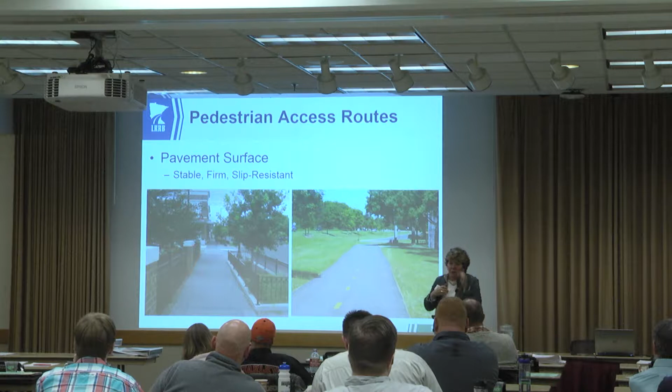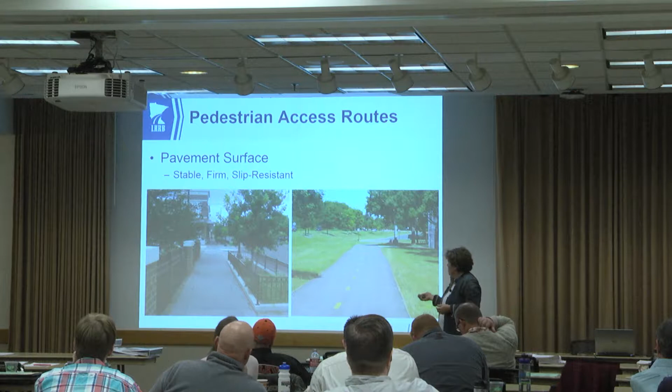Also, if you allow for any secondary cracking, we could get to the point where we meet or exceed the 1/4 inch differential in surface elevation. So bituminous trails offer their own kind of maintenance issues when they fall in the PAR, which they do, because that's why we have them.

Over here we have another kind of pavement surface which is totally okay in the pedestrian access route as long as it is stable, firm, and slip resistant. So here we have a boardwalk. That one looks like wood. You might also have a Trex or a plastic or a composite type of product. Totally okay, but we have to do some things. We have to make sure that there's barriers so somebody doesn't walk off there. We have railings and handrails, all that for safety.

But in the PAR itself, we have to make sure that the boards are closer than 1/2 inch apart. Also, with this kind of surface, you might get some kind of heaving of a board, and it might throw you out of compliance because a vertical deflection of greater than 1/4 inch is a tripping hazard.

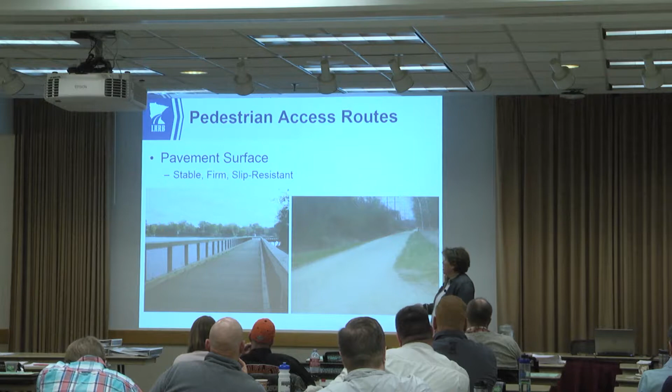Over here we have gravel. Totally okay, as long as it is stable, firm, and slip resistant. So once you get gravel that starts to be washboarded, or you have some bird baths in it, or other things that would not be stable, firm, or slip resistant, then it needs to be maintained or graded so that it is acceptable in the PAR. Sometimes you get greater than 1/4 inch deflection on a gravel road though. I know. So that's a problem.

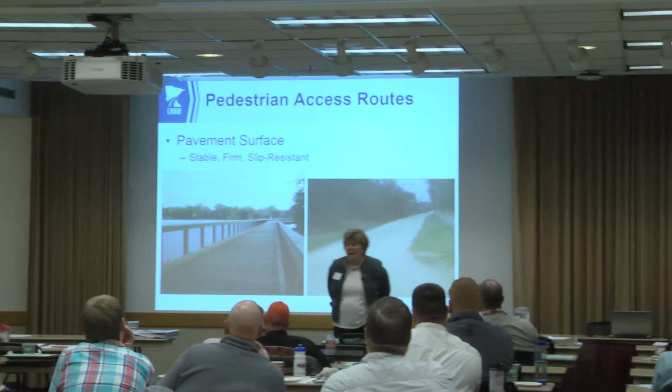Presents an issue. Well, yeah, I'm thinking of, on a gravel trail, that's different than a gravel road, although if your road is the only corridor between destinations, I suppose that becomes part of your PAR. So watching for those localized bird baths and low spots would be something that you'd have to add to your list of maintenance checks. 1/4 inch is pretty shallow on a gravel surface. That's a piece of aggregate, right?

Yeah. So we have to think about, obviously that's ridiculous, but I think the overall idea is a change in the surface, et cetera. It's a surface itself of a 1/4 inch. Do you want to add anything to that? And chances are, if that gravel road has that kind of deflection, it probably violates one of the stable, firm, and slip-resistant requirements. You'll hear us say that a lot if you haven't already. And the other thing is that 1/4 inch vertical deflection can increase to a 1/2 inch if there's a bevel, like a 1 to 2 bevel.

Yeah, so then we're going to get out there and survey our bird baths. I think the overriding idea here is gravel would not be my first choice, but if I have a trail that's gravel surfaced, I think requirements of the PAR apply, but clearly gravel has its own set of challenges. Let's see, the next one.

We're in the metro area, so maybe some people are going to raise their hands. Who has some cobblestone in their jurisdiction? Yeah, where are you from? City of Minneapolis? St. Paul? Minneapolis? Yeah, so believe it or not, there's still cobblestone around. I drive over it as I get to the U down Main Street by River Place, but this is not an optimal surface for a sidewalk, obviously.

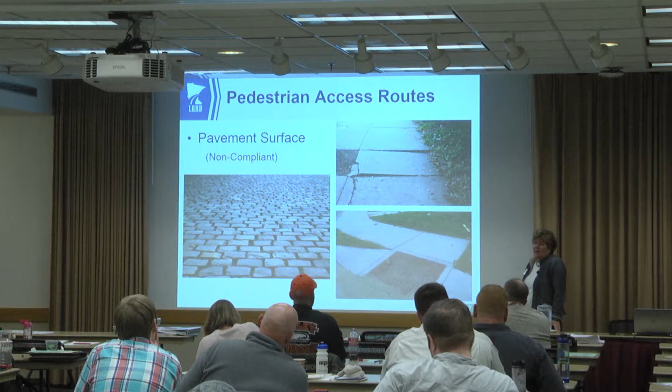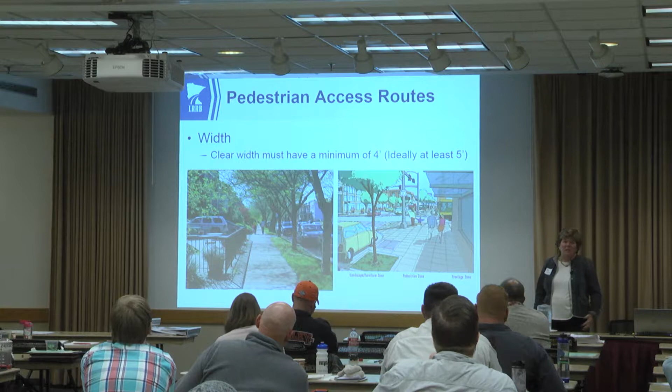So we talked about surface, now we'll talk about width. Brady already talked about PROWAG having a minimum width requirement of 4 feet. MnDOT elevates that to 5 and even prefers a 6. So clear width must have a minimum of 4 feet. And when we go through the standard plans after lunch, MnDOT does allow you to go down to 4 in situations where you don't have any other options. So I think 4 feet is kind of our bare minimum.

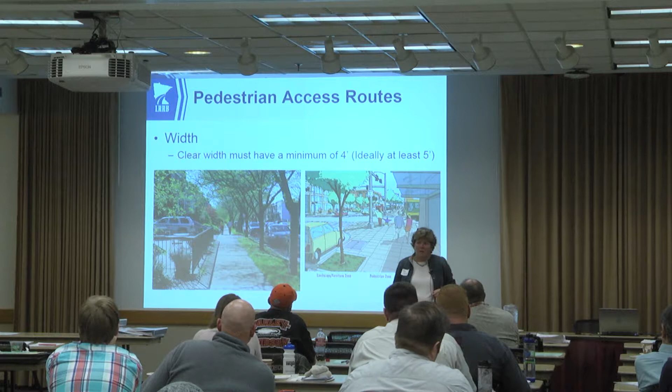This becomes a challenge sometimes, especially when you're in a commercial district. So now I'm expecting a lot of hands. How many of you have commercial districts in your jurisdiction? Lots of you, right? So when you have lots of doors, you have stairs and ramps, all this stuff kind of infringing on your pedestrian access route, we have to still maintain that 4-foot width. So we'll talk briefly about doors, not too much, but that is part of the consideration.

If the clear width is less than 5 feet, then the standards require you to have a passing zone every 200 feet. What is a passing zone? This is not like a little bump out with signage that says passing zone. What it is, your sidewalk or your PAR has to allow for this additional width within a 200-foot limit.

So Brady and I worked on the University of Minnesota's evaluation, looking at every square foot of concrete sidewalk, which was millions of square feet. And we found that this is one thing the U met without any problem, because within a 200-foot linear distance, even where they had sidewalk that was less than 5 feet, there was usually a door to a building or a widened section or an intersection.

You know, just think about the U. There's plazas all over the place. So this is not a problem at the university. It might be a problem on a city street where you have a block that's 300 to 400 feet long. If you don't have any wider section mid-block, you might have to allow for a passing zone. Has anybody ever heard this requirement before? A few yeses? Okay. Over here, we have lots of fun conversation about this.

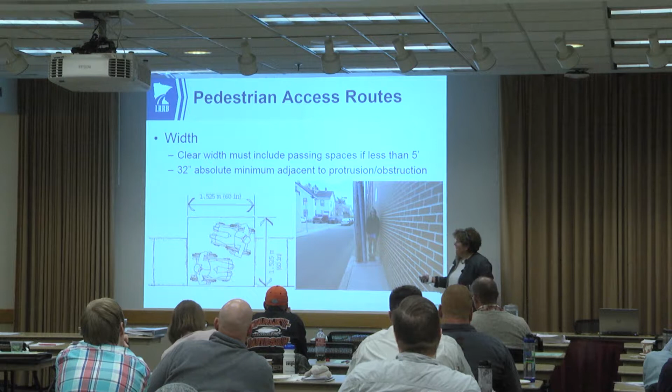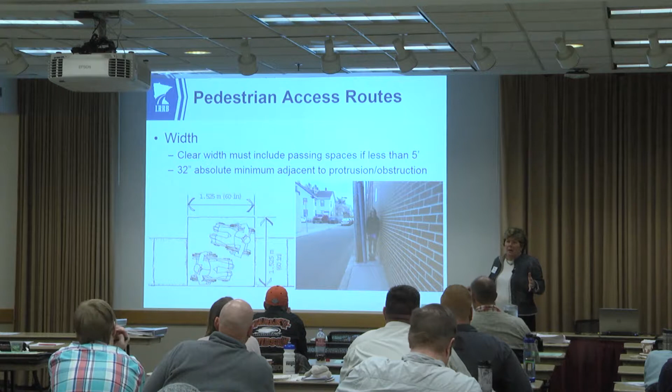We see there's a sidewalk across the way. If this is part of the transition plan, the engineer or the planner might say, this is going to become our PAR when we redo this road, and this sign is going to get relocated so we can maintain that clear width through here. This driveway is going to get redone so that we can maintain the cross slope, and that becomes a viable alternative. So our message today is every pavement surface does not have to be within these standards, but you have to provide destination access from one point to another.

Faye, do you have a question? Yeah, is that because there's a protrusion or an obstruction? Well, it's because this doesn't meet criteria. That you don't have to provide access on that side of the street? You don't have to provide access on every side of the street, you just have to provide access. Isn't that correct, Brady? I'm waiting till I turn my microphone on.

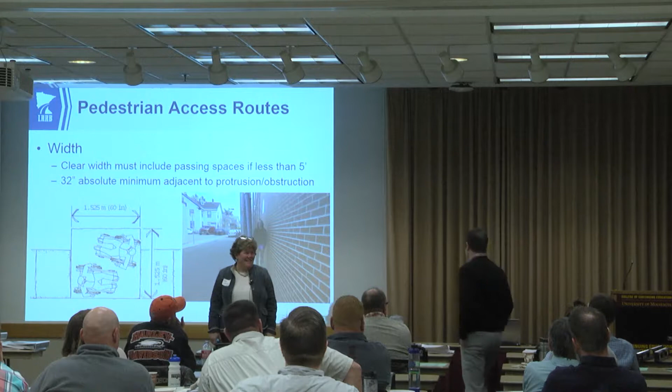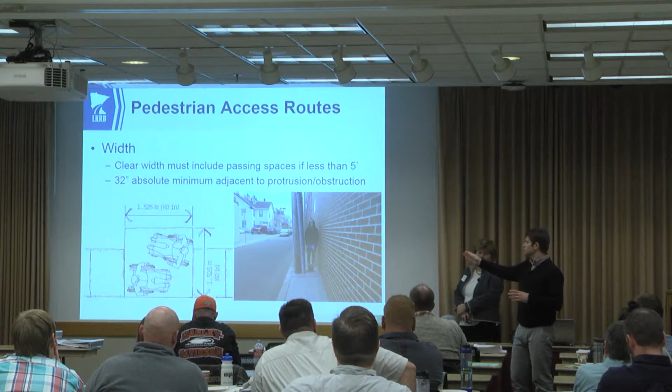What the ADA says is that whatever infrastructure is there has to be accessible. Now, if there is an adequate route, it's a little bit gray. But there's an adequate way to get from one end of that street to the other. It doesn't have to be right here because the cost of removing that pole to make it accessible might be enormous. I don't really know. In this specific case, it might be a better option to just make sure that that other side is the accessible route.

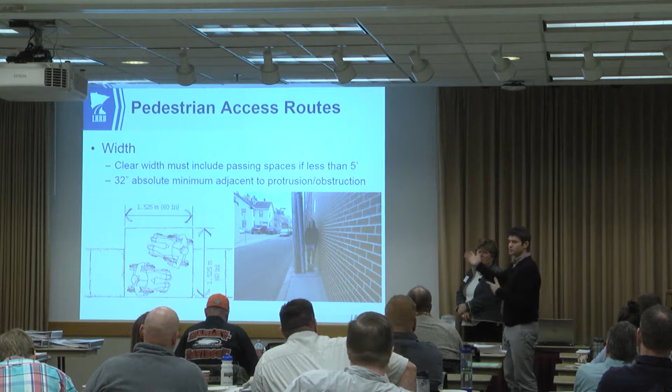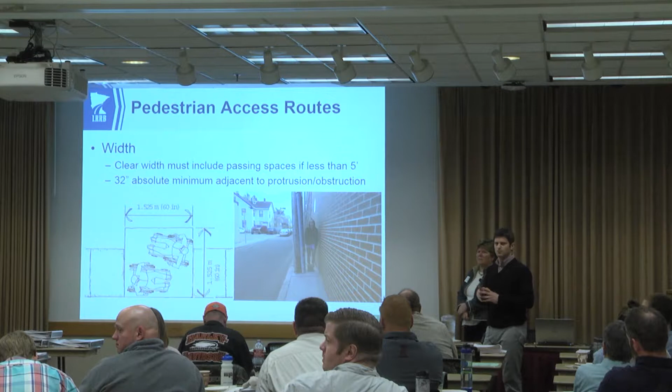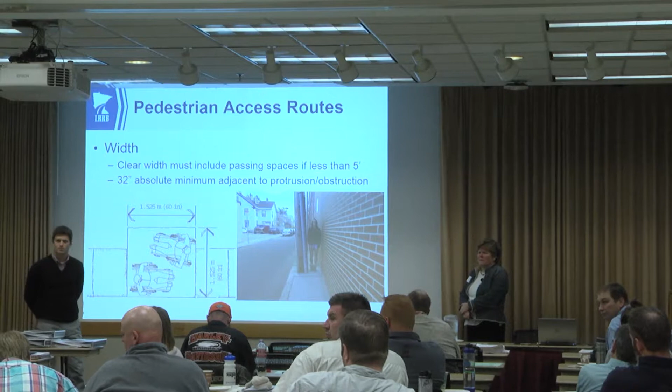So Faye's question was, at T intersections, let me know if I'm inferring this correctly. Let's say you have a roadway that has sidewalk just on one side of the street and there's a T. Do you have to provide access perpendicular even if there's no pedestrian access route on the other side? No, there could be a sidewalk on both sides. Okay. You have to have curb ramps across the T intersection. Yeah. Across the top, in other words. Not across the stem, but across the top, to connect to the other side of the T. Yes. In short, yes.

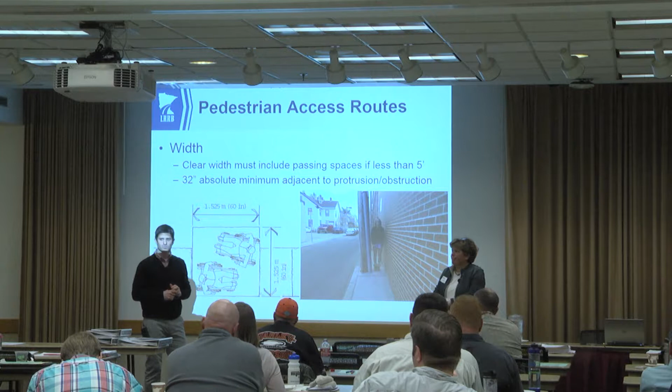If I understand it right, there's a walkway on, let's say, the south end of the street, and then a walkway across the north end on the other side of the street. So you're wondering if this piece has to be provided? Yep. Yes. Because that would be the logical destination of that walkway, right? Feel free to talk to us afterwards if there's more to it.

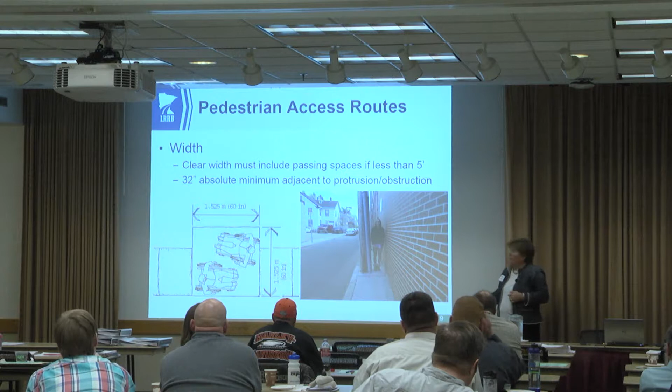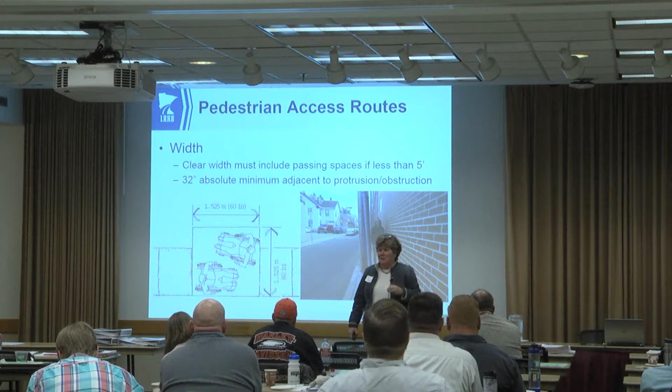Another thing that came up was that, I mentioned it earlier, this may not in fact even be a sidewalk. At the university, we could go on a little field trip and see lots of areas where they pave right up next to a building just for maintenance issues. It'd be hard to get a mower in here, or if you had gravel in there, it'd be difficult maintaining. So then the next question is, well, do non-sidewalks have to be labeled? This is not a sidewalk, or does there have to be other types of guidance?

And the conversation has clearly been, we don't want to advocate excess signage, so no, things don't have to be signed. This is not your entrance. The entrance is over there, etc. So within a context of common sense, this may or may not be a sidewalk. It looks like behind her there's another guy wire and there's additional stuff throughout. It just is an example.

We understand that all of us in this room that are interested in civil engineering and construction and planning have to deal with the earth and the world, which has been constructed long before we were. So there's lots of stuff out there that's not compliant, and dealing with it is a challenge almost at every intersection, right? So we'll continue talking about the requirements that I'm sure will pose other questions and challenges for you as we keep going.

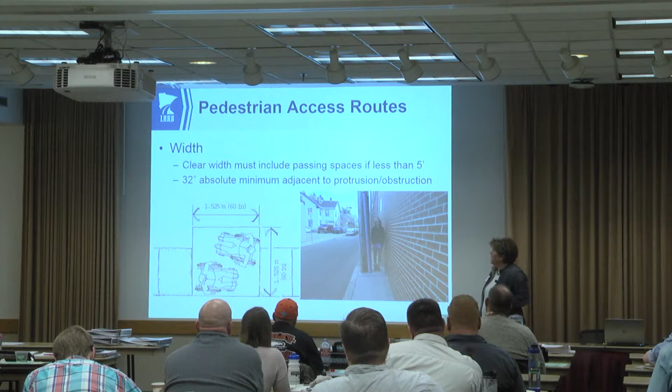Here's one that'll provide lots of challenges for you, especially if you're from Red Wing or Winona County or Duluth. I can't wait till this week when we talk to the guys in Duluth. The maximum running slope, in other words, the slope parallel to the direction of the wheelchairs, is 5%. All right, now lots of roadways. Who here has a road in their jurisdiction that has a longitudinal grade greater than 5%? Quite a few of you.

So even you're in Cottage Grove, right? So even somewhere you might not even expect that, going down to a river area or a park or something, you may well exceed 5%. MnDOT lets you go up well beyond that. If there's a sidewalk adjacent to a roadway that is greater than 5%, then you cannot meet that standard. So there's room in the guidelines and standards for deviating from this if your design is such that it just can't happen.

So for example, if you had a road at an 8% grade, there's no way that you would ever make up that change in grade over the length of a block that would allow you to put in anything other than a switchback or an elevator at the end of your sidewalk, right? So that's just not mathematically possible. So we are going to not worry about those cases. We're going to focus on where we can meet 5% or less, and that's our maximum longitudinal grade.

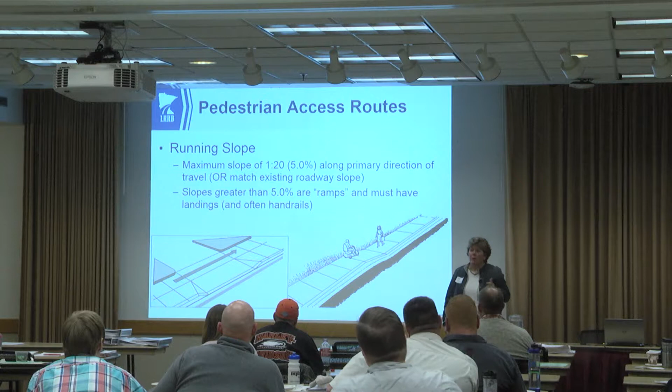Anywhere that you have a longitudinal grade or a running slope greater than 5%, that's considered a ramp, and must have landings and handrails. When we go through the MnDOT standards for curb ramps, you'll see that the maximum on the curb ramp is 8.3%. A curb ramp is not considered a ramp that requires handrails. If it was, we'd go broke putting in handrails at every intersection. So at a curb ramp, you do not need handrails. But if that ramp was somewhere at an independent alignment, in a park, at a building or something, then when you exceed that, you need to have handrails.

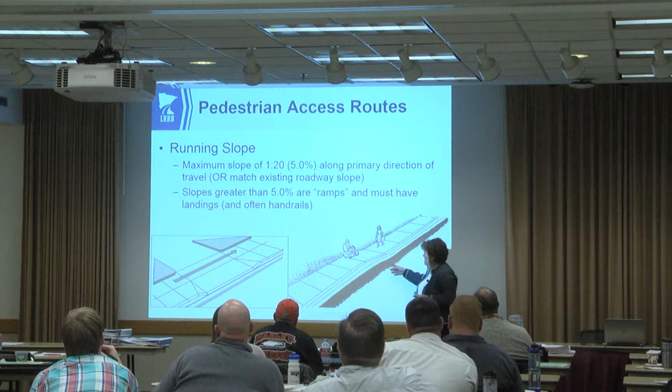This shows our first landing. We're not calling this a road because we know that would be impossible to build, but a landing is this area that's required every time we have a slope greater than 5%; you have an elevation change greater than 30 inches, you have to put in a landing. The landing has to be at least 4 by 4; with a 5-foot sidewalk it would be 5 by 5, and the maximum grade on a landing is 2% in any direction.

When we get into the pedestrian curb ramps, you'll see lots of landings because those are required at the top of that 8% slope on a pedestrian curb ramp detail. So when we get to that, we'll talk about it in more detail.

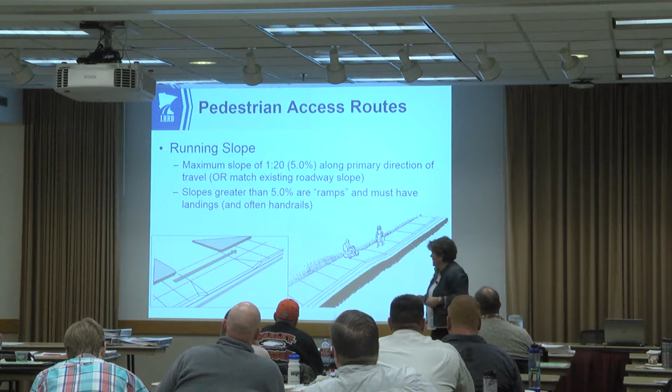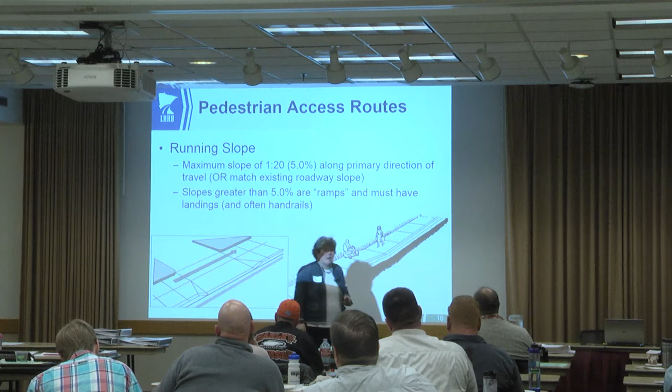This is a driveway. This indicates that even through a driveway, we have to maintain that longitudinal maximum grade of 5%. So if you were coming in through here and you had to go down to meet gutter grade and the grade exceeded 5%, we have some options. You can provide an offset driveway or some other driveway options that allow you to stay within that standard. We'll talk about driveways too.

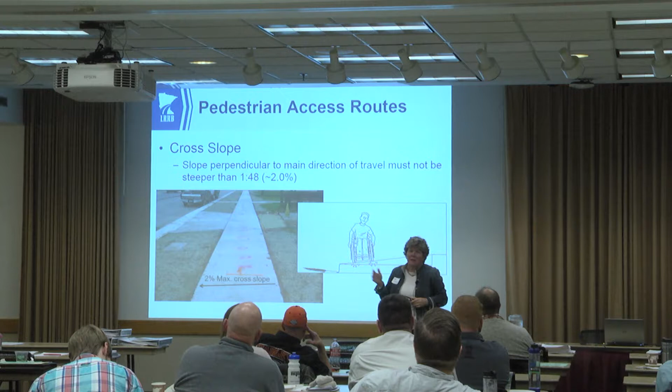Cross slope, that's the transverse slope or the slope perpendicular to the wheels, and the maximum cross slope is 2%. Actually, if you get your calculators out, or maybe you're really good at math in your head and you do 1/48, you'll find that that slope is actually 2.08. We have a binding agreement in this room that we don't tell contractors that. We stay at the 2% because that gives us a little bit of fudge with the contractors. They can actually go up to 2.08%. But our message is 2%. That gives them a little leeway. The standard is actually 1/48.

We had one contractor in our class so far. Any contractors in here today? Oh, good. We don't want to let out any of our secrets. We had to bind and gag him a few times. All right. Just kidding. We really didn't.

All right, accessible parking lots. Brady talked about this a little bit. We have to provide reserved parking stalls. We have to make sure that the aisle makes sense. Now that I've told you this, start looking around, especially this week as you finish up your holiday shopping. Lots of access aisles don't make any sense, and they throw the people in a wheelchair out into the parking lot. My dad was in a wheelchair for a long time, and it's crazy what people have to put up with if this is not well thought out. So the aisle has to provide access. Think about the design of your parking lot.

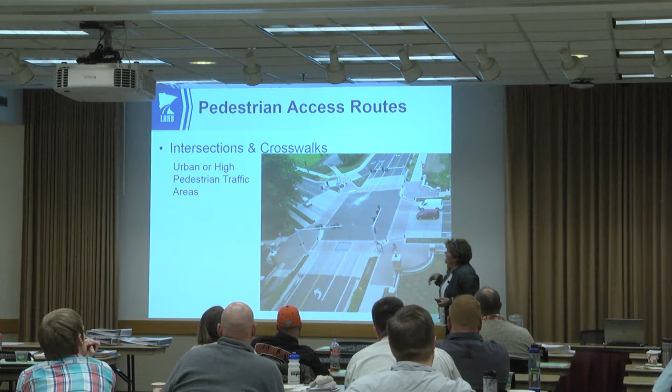Intersections and crosswalks. This is just a picture of a very beautiful intersection. Our standards are significantly exceeded here. So we have crosswalks that are discernible through contrasting colors. We have refuge areas. We have accessible pedestrian signals, all kinds of features that we don't necessarily always have. Here we see some additions. We don't have domes here, but we do have some kind of pavers or stamped concrete. This looks like pavers in here that provide just a kind of refuge area. Not required. What is required is access through.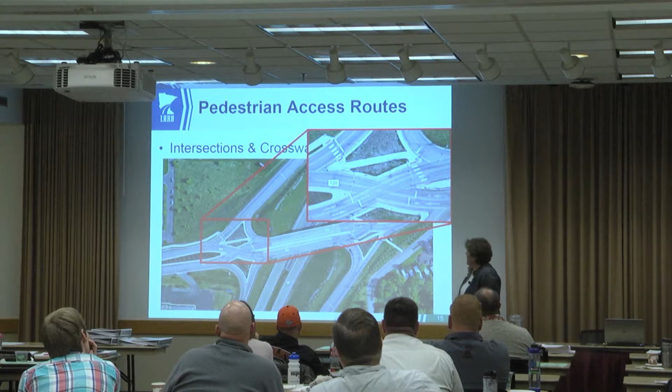This is my cue to stand right here and talk about it. Access must be provided through an entire intersection. So, good example till the very end over here on Dolores Drive where we don't have access. Just a few more things to point out. We'll talk about these truncated domes and where they sit, where they're supposed to be, and they're pretty confusing because we got all kinds of geometry at intersections.

So what are the rules for where they must be placed and how they must be maintained? Over here we have a nice crosswalk. We see domes back here. We see the curb cuts. Here we even provide an area of refuge that might be acceptable for somebody who's walking, but for a wheelchair-bound person, that's really not big enough.

How many of you are having stamped concrete anywhere in your jurisdiction? Yeah, I know City of St. Paul has lots of it. Because we had people with cobblestones, we kind of jumped over the whole paver conversation. We'll talk about pavers throughout class today, and the fact that they may not be a very good choice in the pedestrian access route because pavers can easily start to deflect.

You could have localized heaving that would exceed that 1/4 inch. They provide a tripping hazard, even for walking people. We might have them open up or have one paver just simply fail and have to be replaced. So pavers are not optimal in the pedestrian access route. There's lots of pavers, I'm sure, in your jurisdictions because we're in the Minneapolis-St. Paul area. Whether they're going to be allowed in the future is something that we'll discuss.

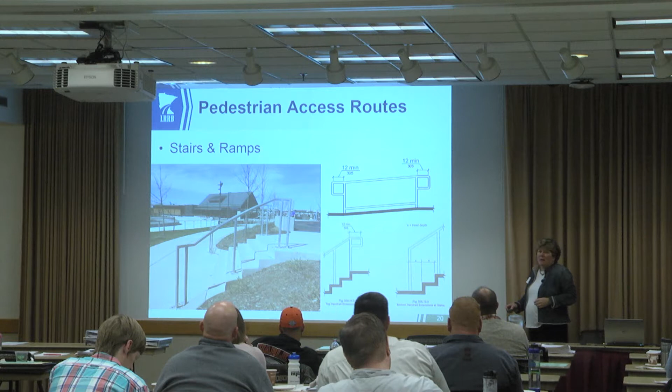But that's a pretty familiar kind of thing that lots of you are dealing with now. So where you might not have had stairs to worry about before, now you got stairs, you got ramps, you got bigger, wider areas where you're going to have geometry challenges that maybe are different than when you have just longitudinal or transverse changes in direction. There's standards for railings and standards for stairs that I won't cover, but will be covered later on in the design classes. Then we talk about landings. I already mentioned this before.

A landing is required anywhere we have a grade change greater than 5%. So we have minimum dimensions of 4 by 4. If we have a 5-foot sidewalk, it would make sense that this be 5 foot. If we did the math here, and this was 2% and this was 2%, this grade would be greater than 2%. It would be 2 times the square root of 2 times 2%, or whatever that would be. And so you can't have 2% longitudinally and 2% transversely. If I lay my level down, it has to be no more than 2% in every direction.

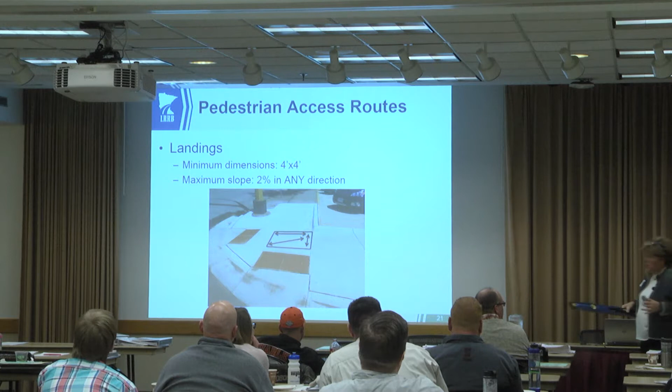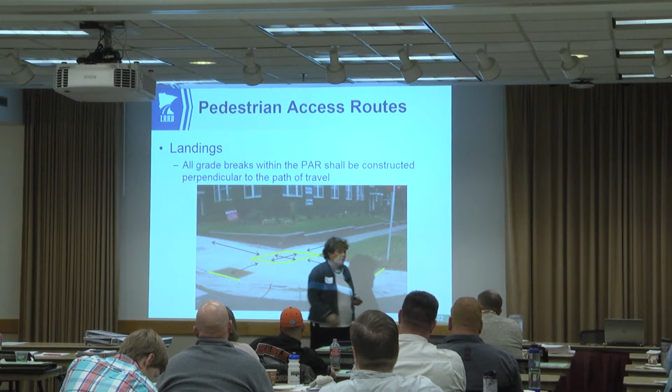Here's another one. Also, as we're laying out these grade changes, the grade change should happen at a transverse joint location, not only for design, but also for construction. So it's much easier if we have the grade change happen here, here, here, and here. Easier to navigate for a person walking through there, and easier to design, and easier to construct.

Curb ramp components. I'm not going to talk about this specifically right now until after lunch, but as Brady talks about it in the transition plans, the things that we're looking at are in this diagram here. The gutter. The gutter is a big design challenge through a pedestrian access route because we have to maintain a maximum longitudinal grade of 5%, except through the pedestrian access ramp. There we can go up to 8.3. We have to maintain a maximum cross slope of 2%, except in the flares, where we can go up to 10%, depending on if it's walkable or non-walkable.

A non-walkable flare, you're allowed to go up to 1 in 6, which I think, is that 15%? It is, right? Okay. I never announce myself as a good math in the head person, but I'm pretty good at those. 1 in 10 is 10%. That one I know. Thank you very much.

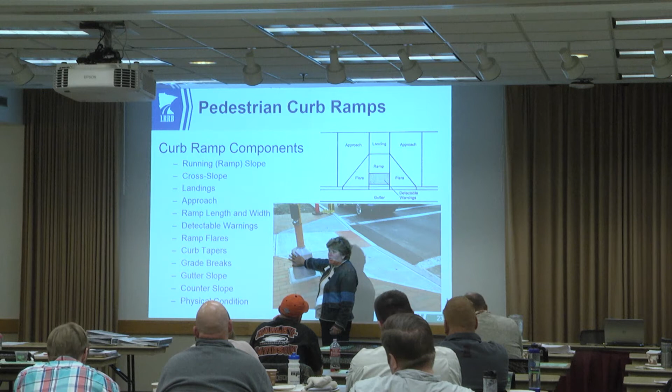Okay. We'll talk about these pedestrian signals, how they must be placed and where they must sit in relationship to the crosswalk, the curb, and the sidewalk. Oh wait, I didn't talk about everything. On the MnDOT standards, we also see where the landing is placed, either at the top or the bottom of the ramp. We see the ramp itself, the detectable warnings, and where those are going to be. This is called a flare. Again, it can be walkable or non-walkable, depending on how you might expect somebody to come through here.

So, what do you think? Is this a walkable flare or non-walkable? Walkable. It's walkable, because you would expect somebody to come through here and think they could cut through there, right? So then it has to have different standards than something where you would not expect somebody to walk. This is the approach panel, and I think I covered everything then.

Sometimes those get, especially trying to get all your slopes right. We've had it to where you get it all set up proper, and then you get your smart level, and guess what? You gotta rip it all back out and redo everything. The guidelines are so hard. I know. Especially when you're trying to retrofit. And then the contractor's getting mad at you because you're like, this isn't gonna work. And they're like, F you. They go, no, just turn it around and then it'll work. And you're like, well, I can't promise the MnDOT guy is gonna have it in the same direction, right?

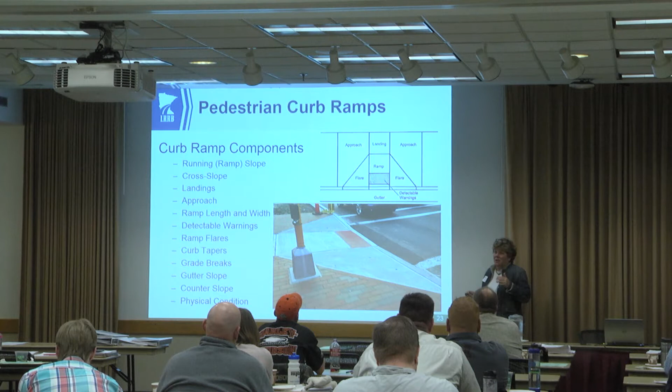So we'll talk about that when we talk about the construction part. There's some things you can do, but we get it. We know this is really hard, especially when you're talking about a mill and overlay or somewhere where you're trapped with some grades and elevations. You don't have a lot of play. So 100%. Agree with you.

The running slope, I mentioned this before. The running slope is the slope parallel to the wheelchair wheels. So in this example, this is the running slope. We need a landing here if this slope exceeds 5%. Oh no, we need it for 2 reasons. If it exceeds 5%, we need a landing there, but we need one anyway because a landing is also required anywhere there's a change in direction. And I haven't said that before. So landings are required where you have a grade exceeding 5%, but where you also have a change in direction.

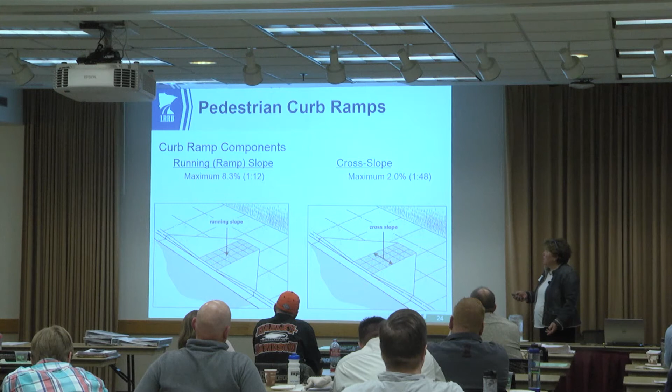Then through here, this is the cross slope. The cross slope changes, and then the cross slope also runs through the gutter. And that's a maximum of 1 in 48. Again, we use 2% to give ourselves a little bit of fluff.

Here's an example of a couple landing options. In the MnDOT standards for pedestrian curb ramps, you'll see landings which may or may not be required depending on which grade is required to get down to the gutter. If that grade is greater than 5%, you need a landing, or if you have a change in direction.

So on this one, if this wasn't here and this was 5% or less, there wouldn't need to be a landing, but once you introduce a change in direction, then you gotta have a landing. The reality is because of geometry, more often than not, that initial grade is gonna exceed 5%, but we got a million different options out there in the real world, and sometimes you might have a very flat intersection where you don't have that. You probably at that point also have a change in direction though. So landings are a common element in pedestrian curb ramps.

Also, the minimum dimension is 4 by 4, preferably 5 by 5 if you have a full walk width. It would be ridiculous to have a 5-foot walk narrow down to a 4-foot landing into the curb ramp. So we try to match and make sense. So again, the approach is a pavement leading to the top of the ramp. It must be parallel or perpendicular to the curb. Pretty much, I was going to say there's probably some geometric situation that violates that, but that's our overriding principle.

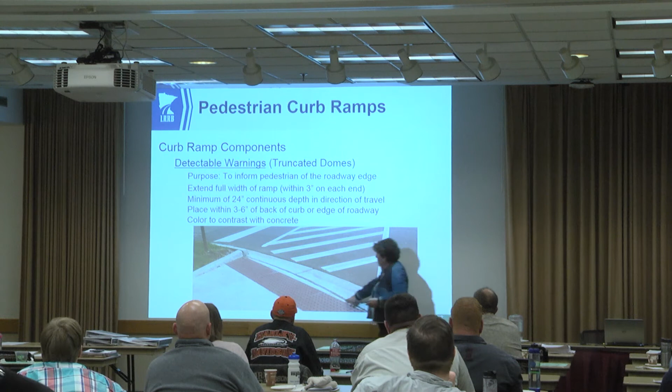So the question always comes up, can we cut these up? Can we kind of put them in a weird kittywampus staggered direction? And our answer has been, no, that's not how they're meant to be installed. And so depending on what you have, ask us. You might have some situation that's really interesting and we would all learn from it. They must be placed within 3 to 6 inches of the back of curb. So we see here between 3 to 6 inches of the back of curb.

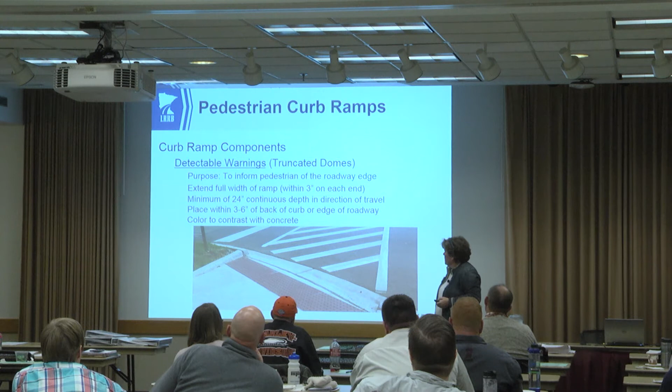They also come in a radial type of situation. We'll show you the standard plate for that. And the color must contrast with the concrete. They also must be installed correctly so we don't have a lip or any kind of tripping hazard on them. I'm sure you guys are going to have lots of questions because we have fielded many questions about those domes.

So please, this is a no shame group, right? There's no judgment here. So if you have a weird thing, we've got a big whiteboard over there. You can draw it out and get a whole bunch of free consulting help today from everybody in the room as to what to do in those weird cases.

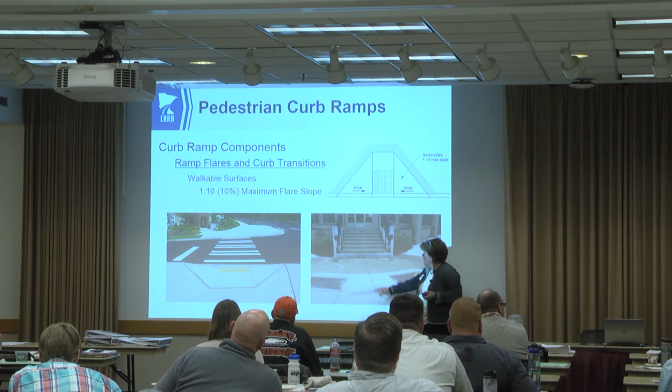The flares and curb transitions, they may be walkable or non-walkable. This would be considered a non-walkable because it's in the middle. Clearly somebody's going to go either here or here. Now it's concrete. Can I walk on it? Yes, but I believe this is a 1 to 6, isn't it, Brady? On the nose? That'd be 1 to 10. Oh, this one is 1 to 10? All right, well, we got other examples on the edge where we can go up to 1 to 6 with that nose detail. Here we have a walkable flare. 1 to 10 would be the maximum there.

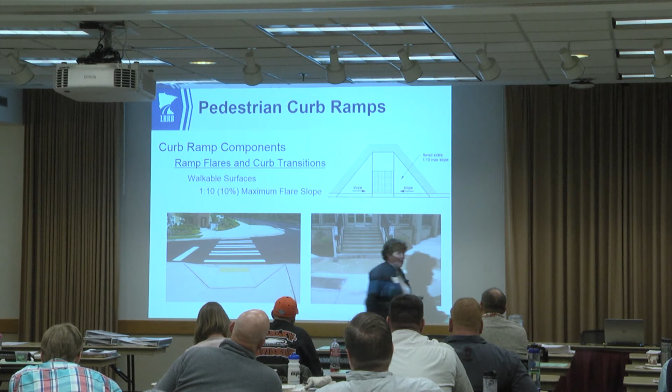Now I'm trying to find one of those situations to absolve myself. Here we go. So here we would have a concrete non-walkable. Now again, can I walk on that? Yes, but there's really no reason for me to do that, so we're allowed to go at a 1 to 6 there. Did I say that right?

Thanks. Okay. Here we have another situation where it's graded, clearly walkable, but not something that we would expect a visually impaired person to be walking at. That also could be at a 1 to 6. And then also where we have a transition where we choose not to put in the flare, we could put in the return curb or the vertical curb.

How many of you have that vertical curb up against any of your intersections, any of your ramps? Not too many. So how did they get away with not putting truncated domes on the top where they have a vertical curb? Because it's not a true crosswalk or what? So here's where detectable warnings get even a little more confusing.

So back in 1991, the original ADA standards came out. Two times in the 90s, they removed the requirement to have detectable warnings on a curb ramp. So there's a chance this was installed at a time where they weren't required and are therefore compliant. But if they're built or modified today, they need those truncated domes.

I think that's really bright concrete, it does kind of look new. It also could not be, it might be not local, in which case I don't know how they deal with that, but they should meet the minimum national standards of having domes. It could be an old picture.